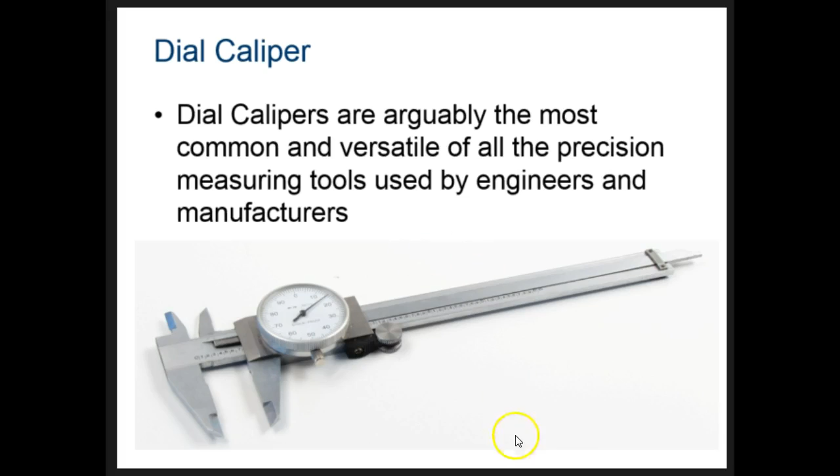It's obvious that you can use this to measure things, but there are actually 4 different ways to measure with these, and you've got a handout so you can remember these later, because you're going to be practicing with all of them.

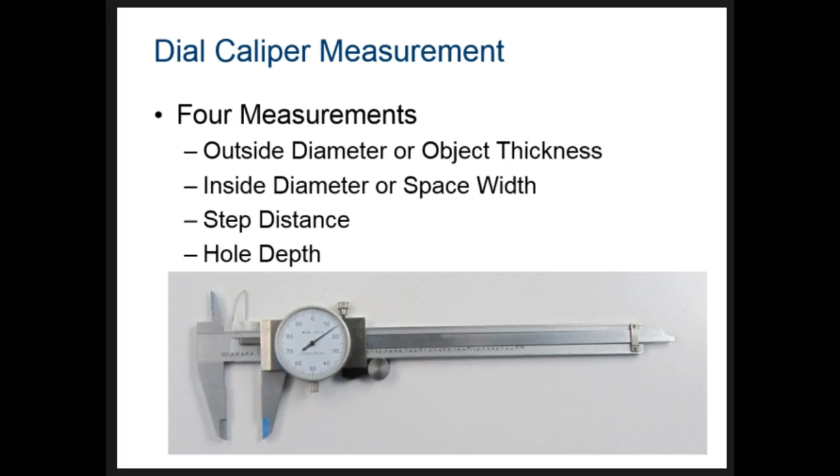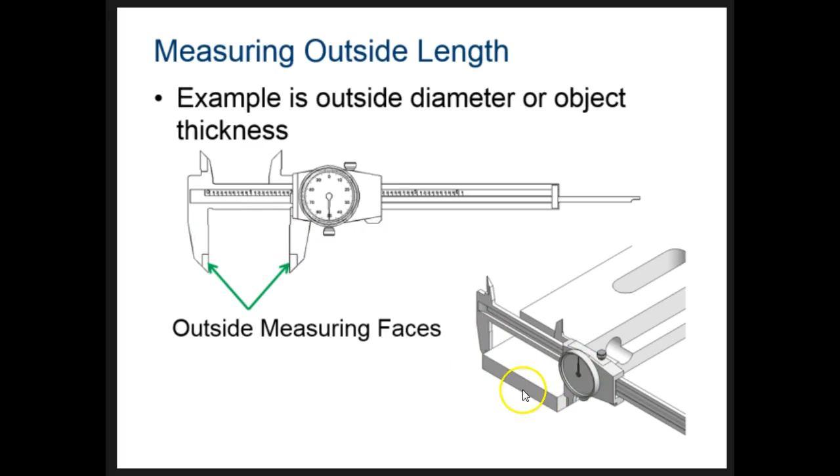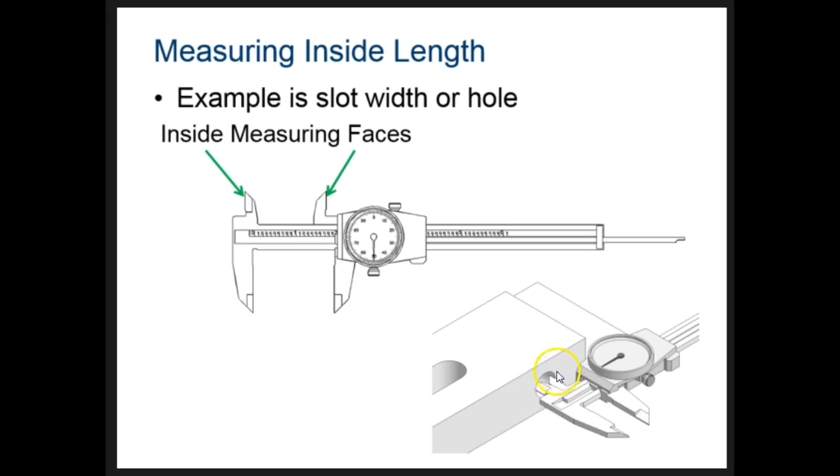We can also measure the inside. If you look at this little hole, I can't measure the outside of it, there's no way to measure it with this. You could pretend and just put them close, but that's not a precision measurement. So we use these smaller ones up here, put them inside the hole, and push out to get the perfect measurement.

We can also get a step down, like right here. How thick is this step down? Again, you could eyeball it and guess, but the whole goal of using a dial caliper is to get a very accurate, precise answer. So you put this flat edge on the bottom edge, and then you put this part on the step at the top.

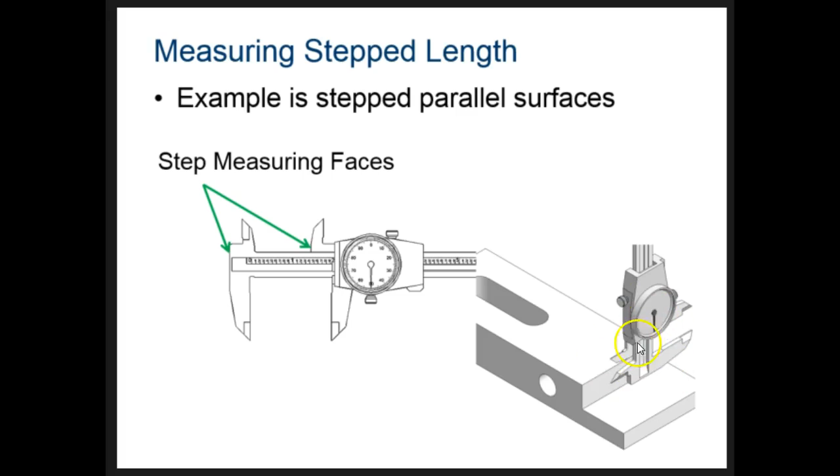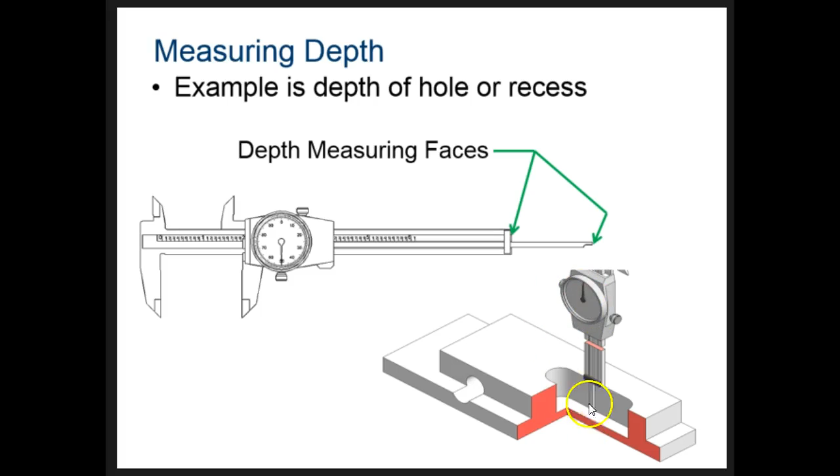And it gives you a very accurate measurement of how far that is. Finally, we have the depth of a hole. How deep does the hole go? Again, you could guess, but this is how you do it properly. You use this end, which I don't think you'd expect to be a measuring part, and put it down in the hole all the way to the bottom, then put this flat edge against the top, and you can very accurately measure how deep the hole is.

I'm going to go through some terms here. This is the blade and the slider. The slider is the part that slides back and forth. This is the dial, and there's a pointer on the dial. This edge over here can measure 0.1 inches, and this is all in decimals. You'll appreciate it, it's all decimals, no fractions here.

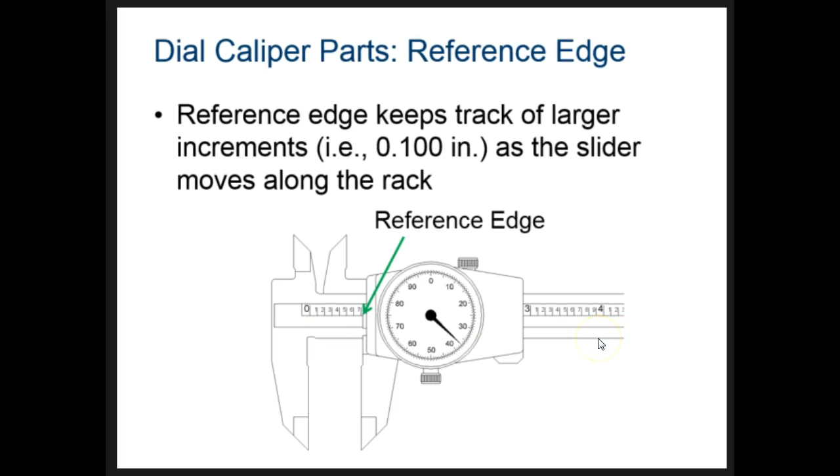In order to use this measuring tool, it has to start off on 0, just like weighing yourself on a scale. When you get yours, it may not be exactly on 0, so you'll have to set it to 0. I've given you a handout so you know exactly how to do it. If it's not on 0, this is what you do.

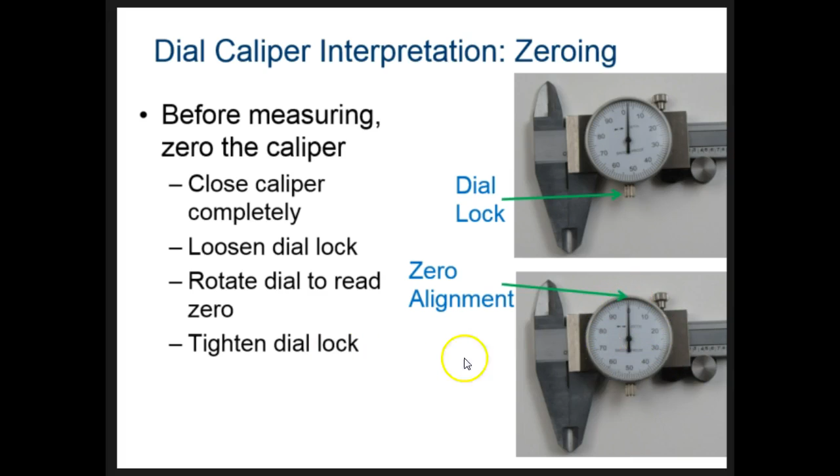Close the caliper tightly, using your fingers to push it completely together. Then loosen the dial lock, this right here, just a little bit - don't take it out, just loosen it. Then turn this whole face, this whole dial, just a little bit until it goes to 0. Then tighten the dial lock back up. You must do all of those steps.

Each time this goes around one whole time, it's gone 1/10 of an inch. So one whole time around here is the equivalent of going from here to there.

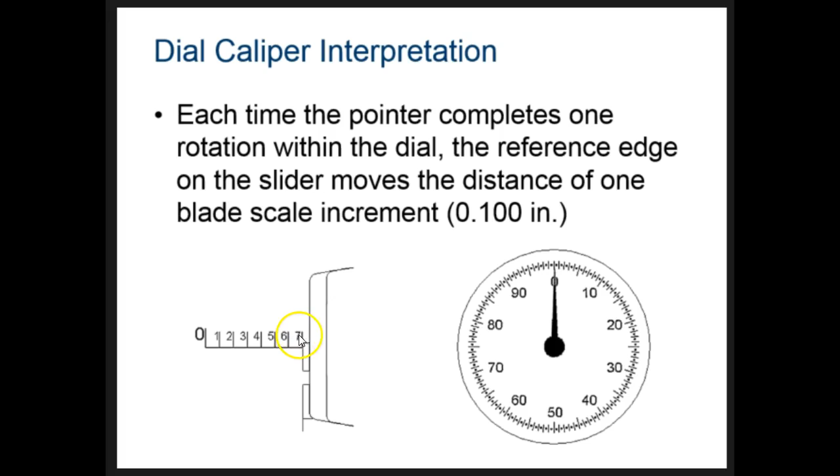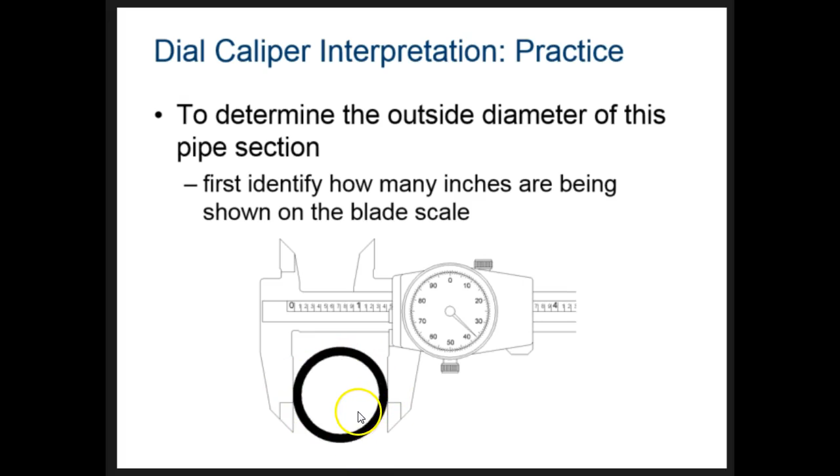So let's practice reading them. If we were going to measure this, this might be the end of a pipe where we just see the very end of it, or some kind of O-ring. We're going to measure how wide this is. First you look for the inch marks. We're starting right here, there's one of the big inch marks, so we write down 1.

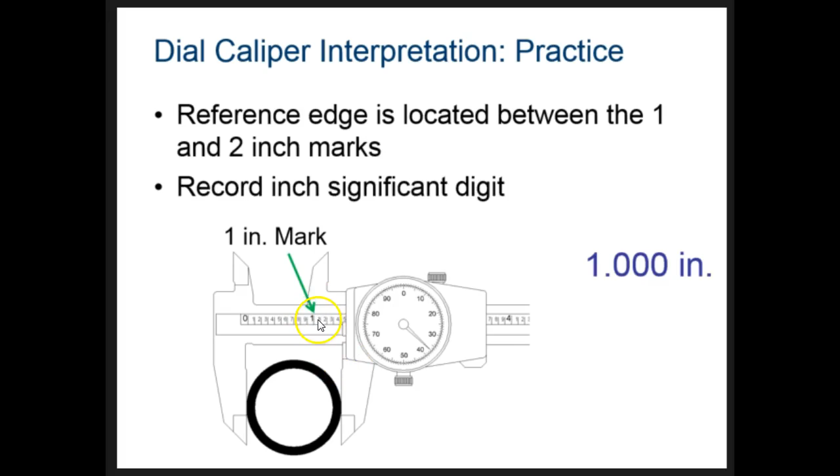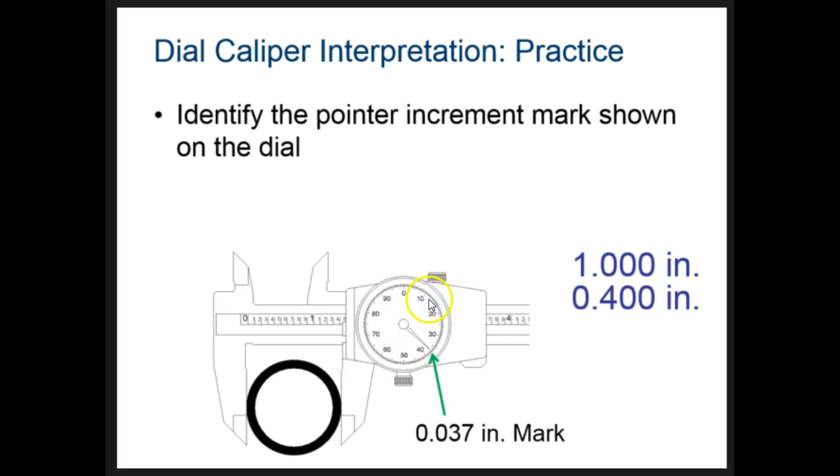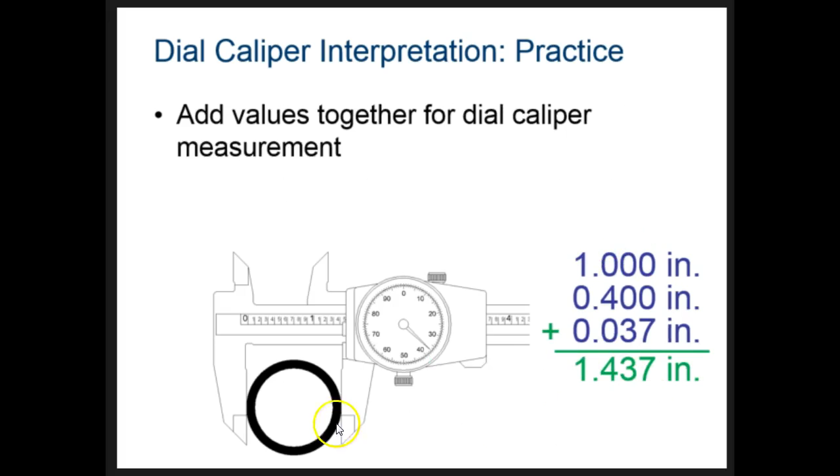Then we look at the small marks - we're just past the line of the 4, so we write down 0.4. Now we look at where the dial is. Starting here, go around 30, so that's the 3, and then you count the little dots going over to get you to 7. Then you add these up. There's our answer: this thing is 1.437 inches wide.

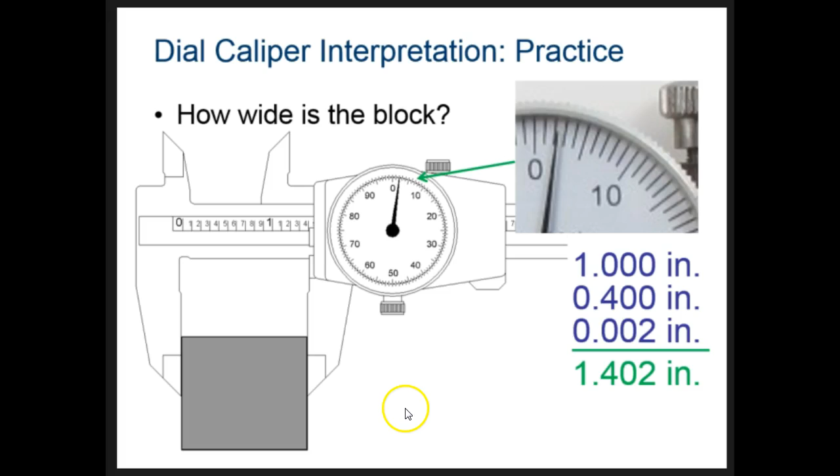Well, you look here, this is 0.002, so we know it was 1, and then we wanted to decide 3 or 4. Would it make sense if it's 302? That would mean it's really close to 3 - is that right? No, it's really close to 4. So it's clearly 402. Okay, and that's it for this video on dial calipers.